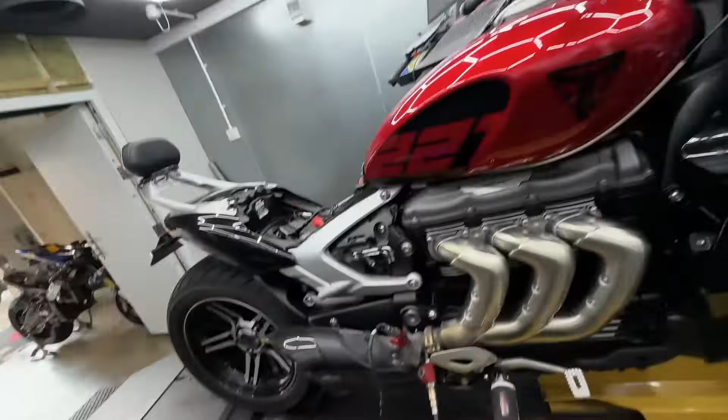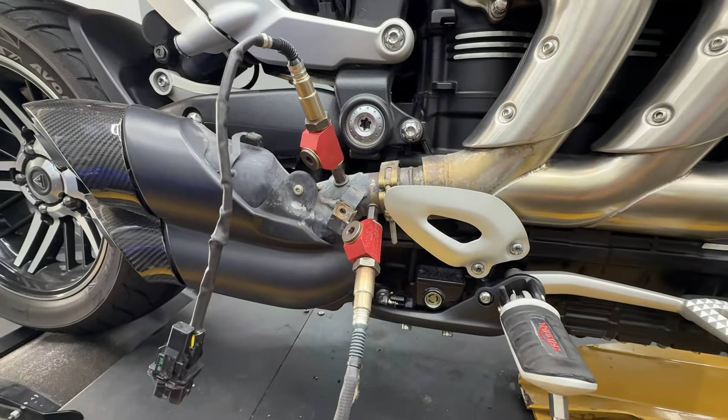So, 22 plate bike, nice lovely colour, and it's got a standard exhaust with 2 lambda sensors in there so I can clarify the readings I'm getting. One's for the dyno and one's for the Woolich Racing software I'm using to map this bike directly to the ECU, no need for power commanders or anything like that. So I can verify the AFR with 2 sensors, and if one sensor goes down, I know about it because they should sit very close together.

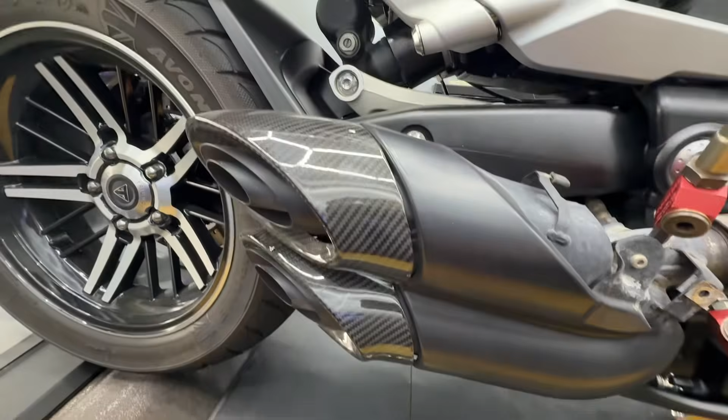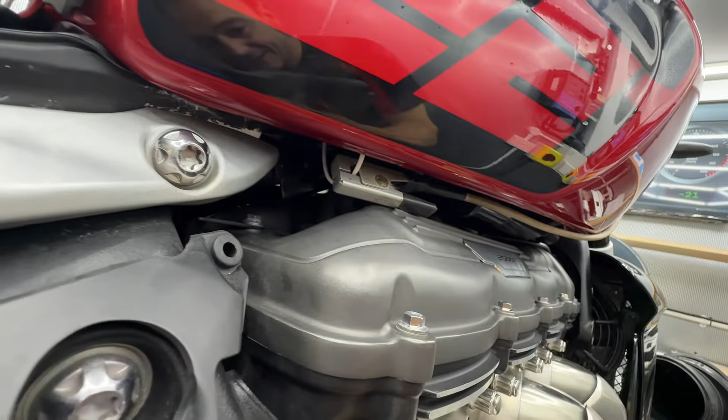It's got some nice titanium carbon fibre tips on it, but standard exhaust, you've got to go in before the cat, the box is still underneath there, and they're a bit of a pain to get an RPM pickup. I had to lift the tank and extend one of the wires underneath there to get a reliable RPM source for mapping on the dyno, as that's the most accurate way. You can do it off wheel speed in the gear you're going to do power runs in, but it's not as accurate, so you need a proper RPM pickup off the bike.

So I made a little extension cable so I could clip the Dynojet RPM pickup on there properly. I've also deleted the EVAP valve to get rid of that side of things, clamped off the pair valve in there as well, and obviously exhaust setup.

I got 2 cones, the other cone was down on this side, because you need to suck all the fumes out of the room so you don't get carbon monoxide poisoning, and also pulling in dirty air to the airbox for the bike isn't good. You need nice clean air to be able to do it.

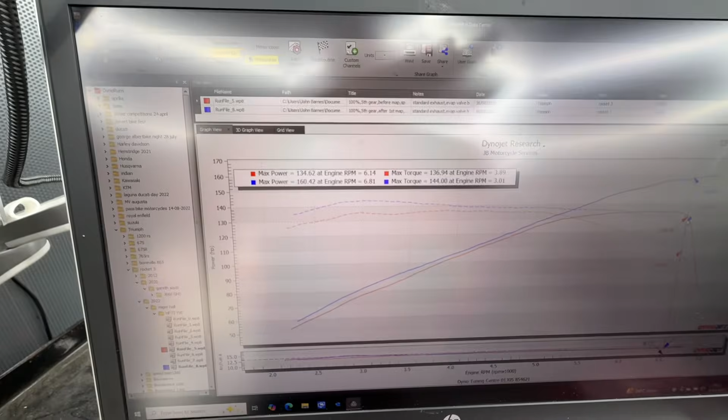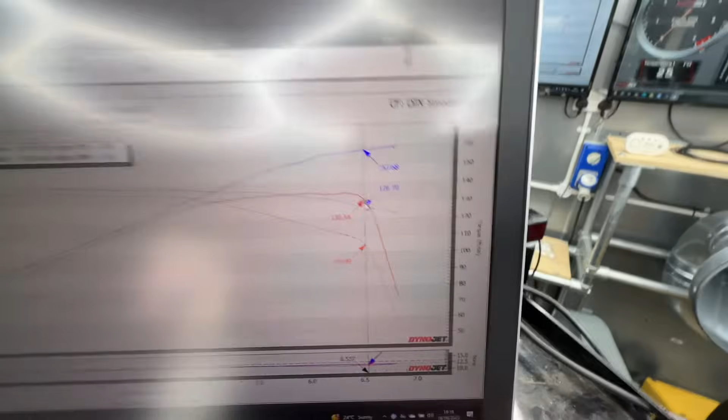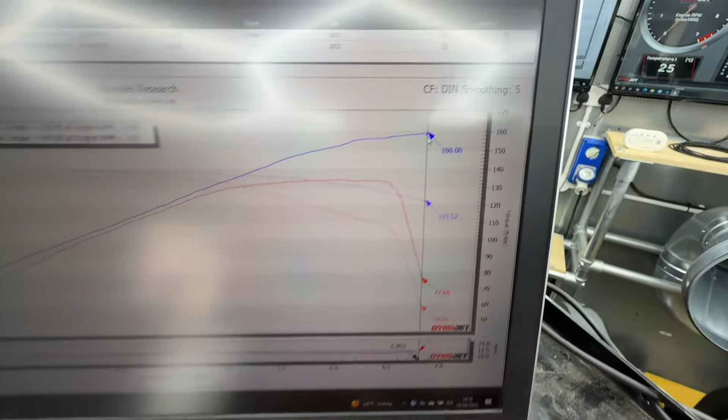So yeah, these bikes are massively restricted. If you look, it's gone from 134 brake horsepower to 160. So at 6,500 RPM it was 130 horsepower, now it's 157. If you go across to the very red line, it is 160 brake horsepower now, and it was 77. That is a massive gain.

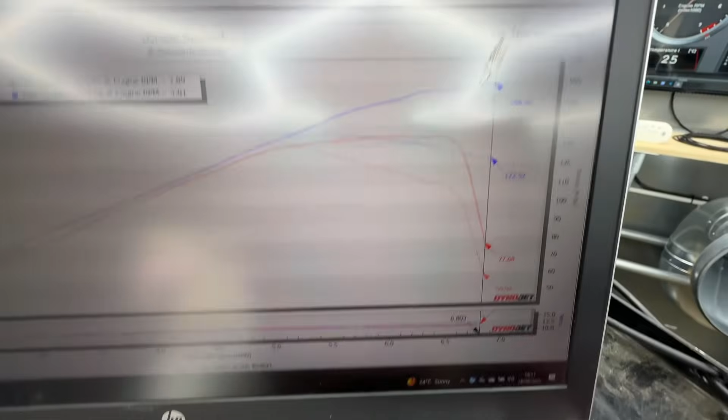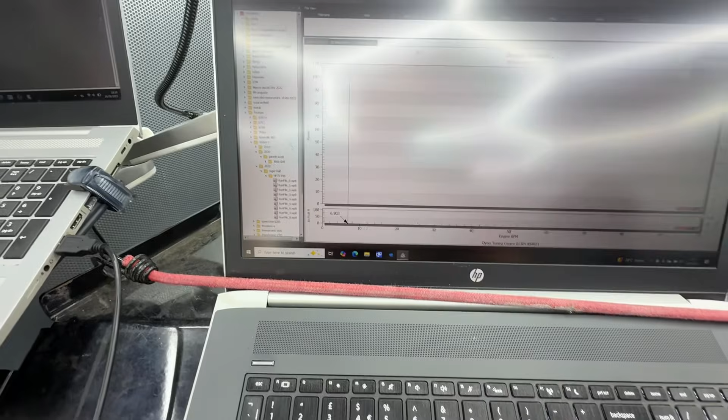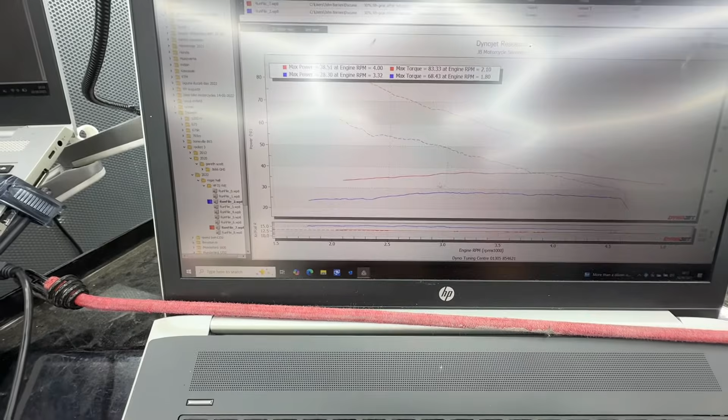Obviously you're not going to use all those revs on a road bike unless you're on track, but from 5,000 RPM look at the gains, absolutely huge. That's at 100% throttle. So let's have a look at, say, 30% throttle. Before I mapped it, look at that - that's 10 horsepower, 28 to 38, 68 foot-pound of torque to 83. This is the before torque, this is the after in foot-pounds, and this is the power. Look at that, 28 to 38 horsepower. So that is 10 brake horsepower at 30% throttle, which you're going to be using a lot on the road.

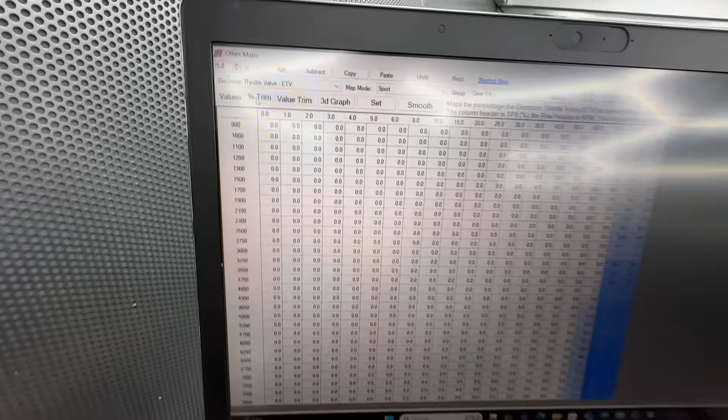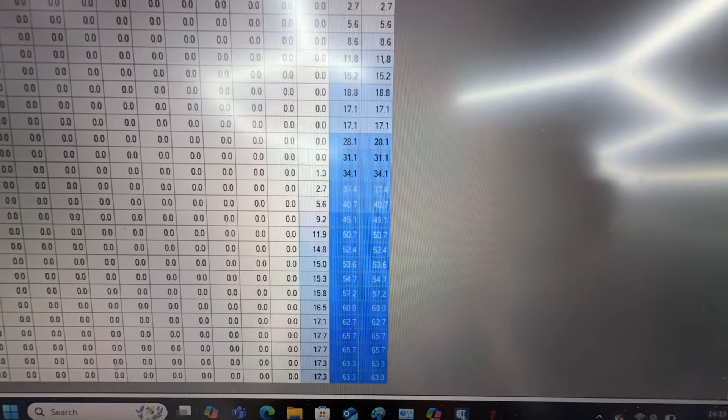And the AFR, you can't get a much better AFR line than that. It was a little bit on the lean side before, but these Rocket 3s are massively restricted in the ETV throttles. I won't go through all the mapping, but in sport mode, 5th and 6th gear, these are percentage values - I've opened them up an extra 63% in places, 40%. It's absolutely crazily restricted.

And when you open them up it makes a massive difference. On the dyno, I could feel it pull through so much cleaner to the red line. It was unreal, which is what 30 brake horsepower does. So yeah, very pleased with the gains.

Obviously this is my dyno room setup, all up and running, gauges and graphs up there. Bike is bolted down to the dyno, which I'm going to get off in a minute. Air intake, exhaust extraction, extra room extraction, which has got to be finished off along with the back wall. But yeah, massively happy with the dyno, working really well.

And yeah, these Triumph Rocket 3s, if you've got one and it's standard, you need to get it mapped, especially if you've got an exhaust on it, as it does run really lean low down in the AFRs, low down in the throttle. And I can't believe this is probably the best gains I've ever had out of a bike. 30 brake horsepower is absolutely massive on a normally aspirated bike. These are heavily restricted and need mapping.

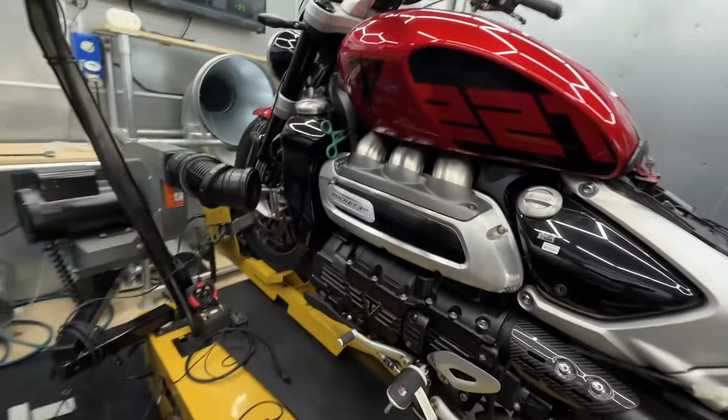Hopefully that's a bit of an informative video to give you an idea of what goes into mapping a bike. I went through and did 3 mapping cycles on the bike to get the AFR like that, so you can't just wing the first lot of settings in and leave it. I went through 3 lots of adjustments.

I've also done the IAP low speed mapping, so the throttle transition should be a lot smoother low down. Disconnected the O2 sensor, overwritten the map, lowered the switch over point, so I've got more control over the map with the TPS mapping, and yeah, very good results.